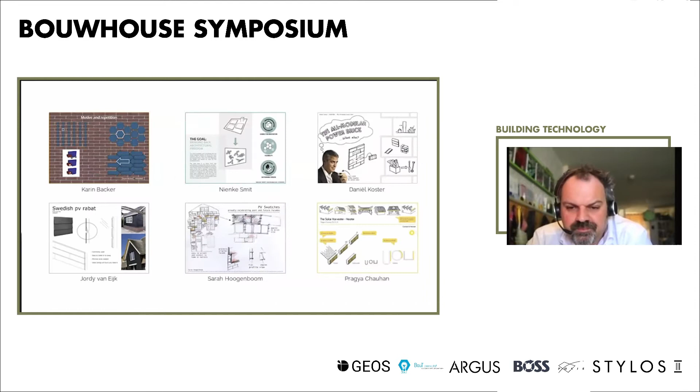We pitched our individual ideas during the first month and came together as a team. We were able to bring architecture and engineering together for a creative design process during the 13 weeks, and we designed a modular product which emulated the look of a brick and could be flexibly installed to get different brick patterns on the facade. We arrived at a unique product which is essentially a solar powered brick.

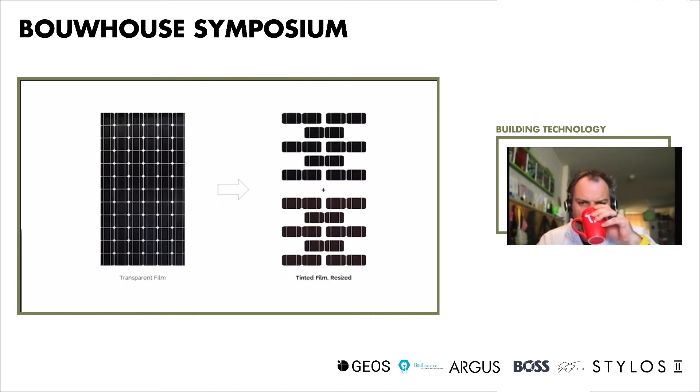During our design process, we were able to talk to experts from the PVMD department at TU Delft, and we were able to determine the best PV material and application. The flexibility of PV technology allowed us to apply it in our design with ease.

Our design changed throughout the project based on research and other design factors such as the ease of mounting and replaceability. Our team created various ideas and concepts and looked at each one critically.

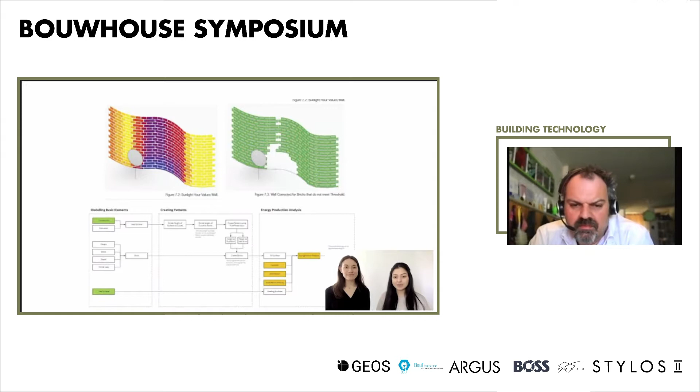We utilized software such as EduPack, which were introduced to us during the Bucky Lab engineering courses, to come up with a suitable material, and we used knowledge from our structures course to be able to decide on a target construction type. We also used computational design to visualize efficient placement of our product on a shaded facade. We went from sketching ideas on paper to working with real materials that resulted in some very practical insights.

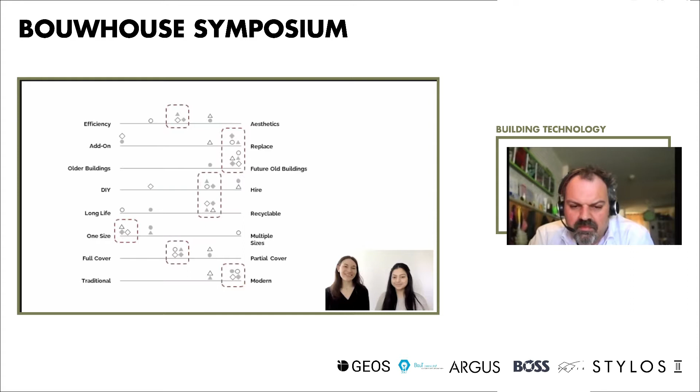And here are some of the results from building weeks. Don't misunderstand us. As individuals on our team, we started week 1 with different visions of what our product would end up looking like. But by the end, we found a common ground through the design process and came up with our final product, the energy brick.

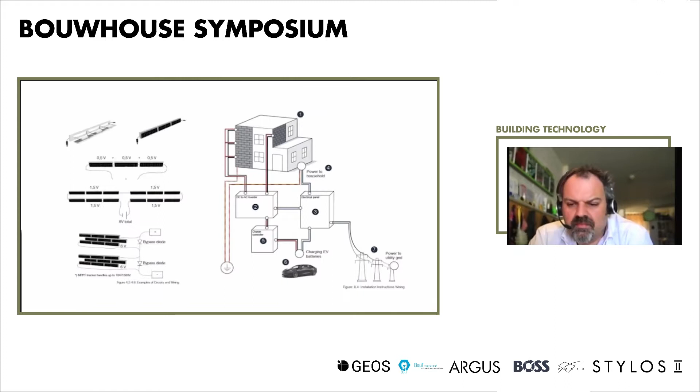The Bucky Lab course for building technology was a unique experience to work closely with students of different backgrounds and to learn more about the technical and practical application of architectural design. We hope to see you next fall in Building Technology Masters. Thank you for your time.

If we go up one scale higher to the building, we have Mega, which deals with a huge project and a nice setup in which the students collaboratively work in a team.

Hello, my name is Shreya, and today I'm going to share my experience of the MEGA course during the 4th quarter of my Building Technology Masters. Along with a team of 8 students, each responsible for their own discipline, we as a team took on the task of creating a skyscraper called the Tree Tower.

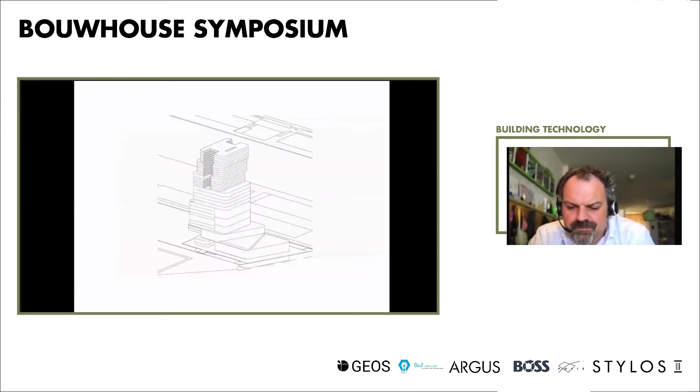The design of the Tree Tower rests on the foundation of the team's vision. The vision was used as a starting point throughout the entire design process. The tree tower acts as a multifunctional building merging industrial, commercial, and residential real estate. With this unique combination of program, the tower is envisioned to be a hub for the surrounding Makers district.

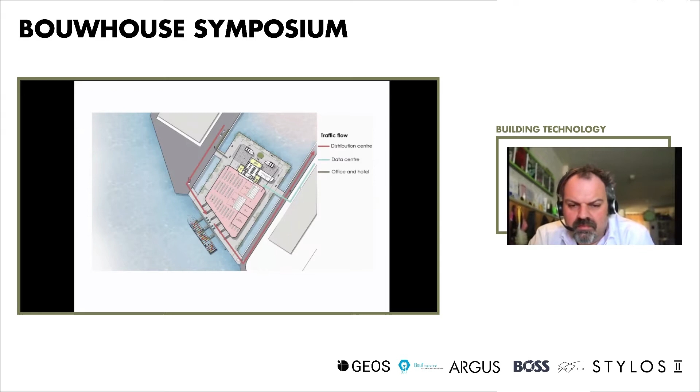A clear distinction was made between the transport of goods and that of the people. By locating the entrances for different functions in separate positions, the transport and logistic flows are smooth and efficient. Similar to how a tree adjusts to external factors, wind and sun played a key role in shaping the tower and determining its orientation in space.

The roots of the tree are interpreted as the part that collects goods, which then will be distributed inside the building and its environment. The concrete core, posing as the trunk, is used for stability, yet it also realizes the transport of water, air, and energy. The green terraces correspond to the branches of a tree. The green areas are positioned in places that allow for maximum daylight to enhance growth.

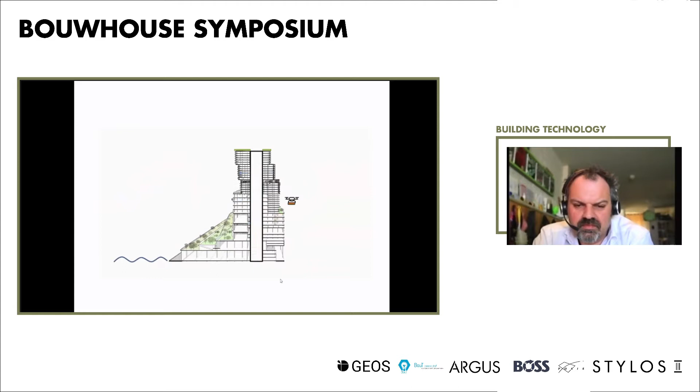This course was a very good experience while working off campus and communicating through online collaborative platforms. It not only enabled me to guide the group as an architect, but also enabled me to understand the issues related to the other disciplines and come up with a suitable solution. This course allowed me to push my boundaries and explore the different specializations in the field of building technology.

That was mega. And if we continue on a building scale, but a little bit broader, we have extreme, which deals with a bigger scope.

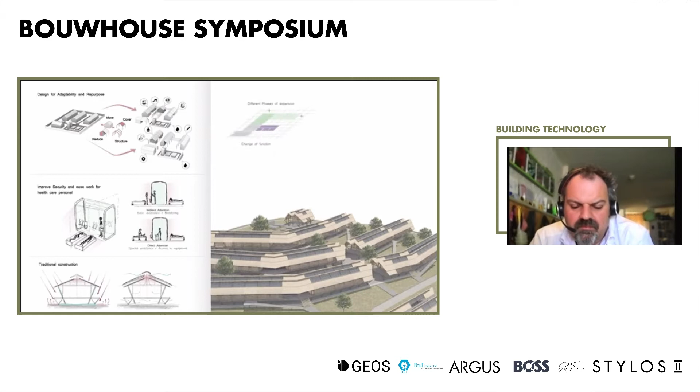The idea was to create an adaptable structure that could later be used by the communities for other functions. The main structure was designed under a modular configuration to attach more units in a linear way, and to accommodate multiple functions and provide flexibility for the spaces to be adapted later on.

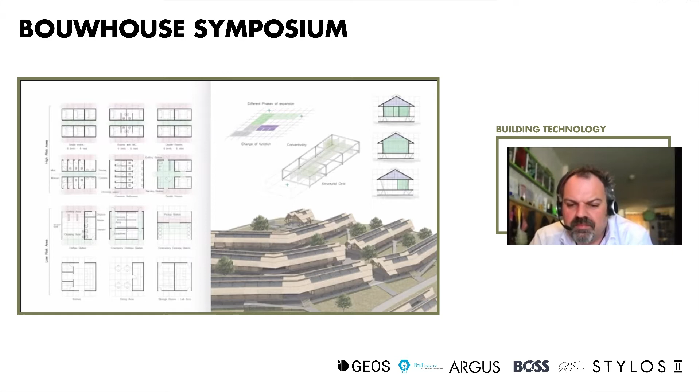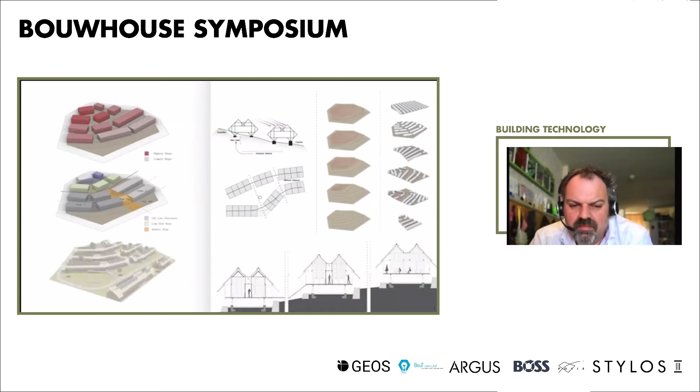For the distribution of these units, an algorithm was developed to analyze the site of intervention and determine the position of the rows of units, avoiding obstacles and following the topography to create leveled corridors.

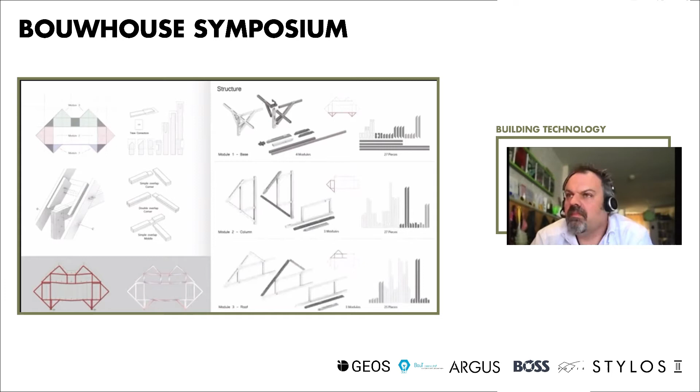The structure of these units was designed with wood pieces of simple shapes and cuts, which are then mounted together to build the main modules for the floor, walls, and roofs. A lot of focus was given to the assembly logic as well, to facilitate the construction and reduce the time and the amount of workers required for this process.

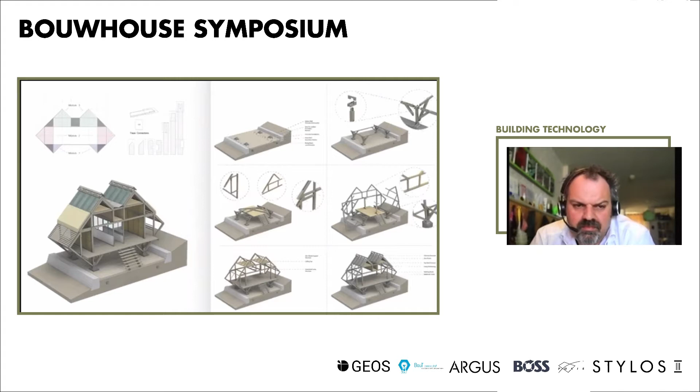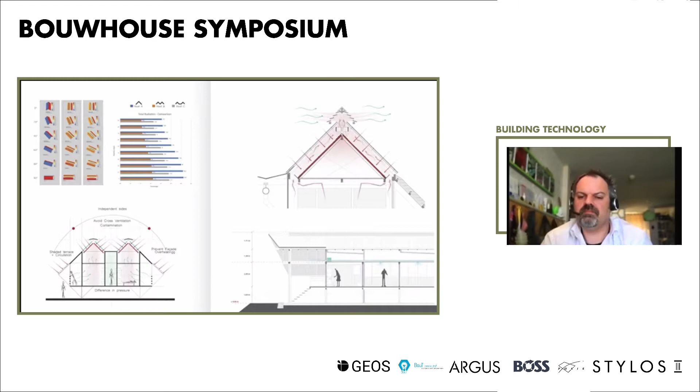For the passive climatization of these spaces, a concept of hybrid solar chimney was implemented with the goal of incrementing the ventilation on the rooms. The system was combined with a mechanical air inlet to create a positive air pressure corridor for the safety of the healthcare personnel. These were the main highlights of the project.

It was a very challenging exercise that required an integral approach of an architectural, structural, and climatic solution to respond to the given requirements. You can see the projects of our batch and the ones from previous years on the Extreme Architectural website. I hope you enjoyed the presentation and thanks for your time.

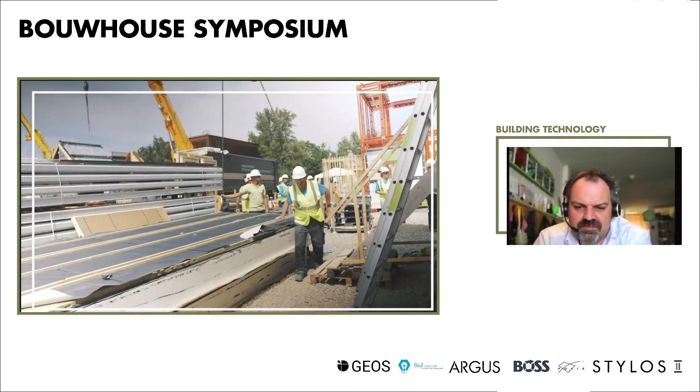So what's happening now is that a wall element will be placed in its right place on our building, and with the help of a huge crane and with the help of some other people it will eventually go into its right place.

Shift 2 is now preparing for the briefing about what has to be done today, and everyone is going inside.

They were raising the flag? We're raising the flag? Yes. We're raising the flag. Nice. Let's do it!

And of course, after a long day of hard working, we also get to treat ourselves a bit. So tonight we have a special occasion and we're going to barbecue with the whole team, so it's very nice.

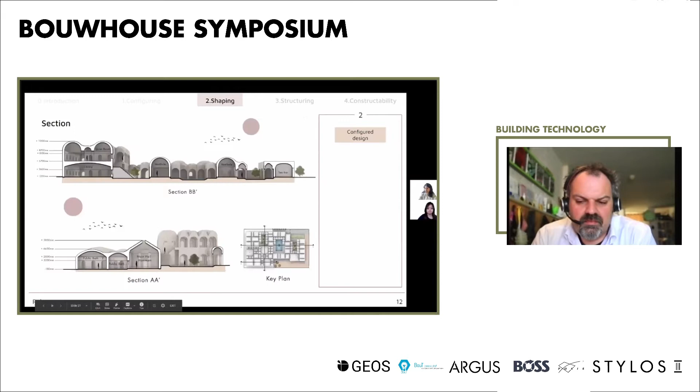The configured design then enters the structuring process. Here, the focus is to design roof typologies such as domes or cross vaults using the principles of tessellations, which are relaxed as meshes and then approximated into surfaces. The primary construction material considered is adobe bricks, and its material properties are used to analyze the structural performance.

To test and understand the constructability of the proposed design, an experiment was carried out. This inspired us to think about the practical challenges, for which we designed a tool to support the construction while eliminating the use of additional formwork.

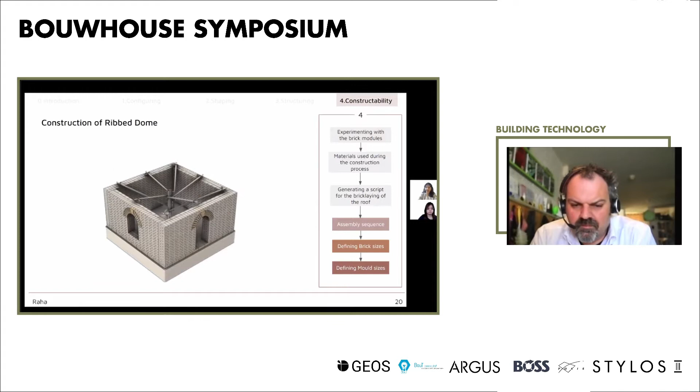This year's aim for Earthy Design Studio was to design a challenging Adobe 2.0 structure that has not been realized so far in reality. For this, a lamella dome tessellation was visualized. This was our journey through the course, and we hope you enjoyed it.

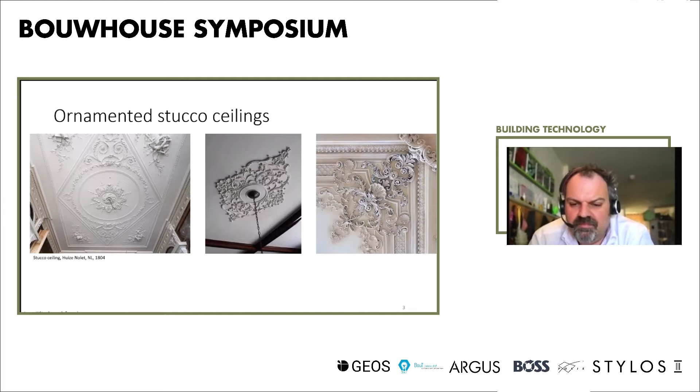Stucco ornaments can be found all across the world, and in the Netherlands especially we find them in the form of ornamented stucco ceilings. Unfortunately, these ceilings are quite fragile and they can damage over time. Traditionally, they are restored on-site by hand, but this is a disappearing craft due to several issues in this field.

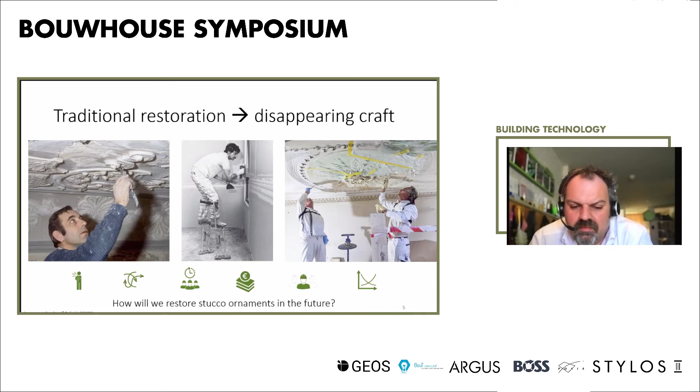So the question becomes, how will we be able to restore these ornaments in the future? My proposition is to use 3D scanning, digital reconstruction, and to restore them by 3D printing them directly onto the wall or ceiling with a robot arm. For my project, I focus mainly on this last aspect.

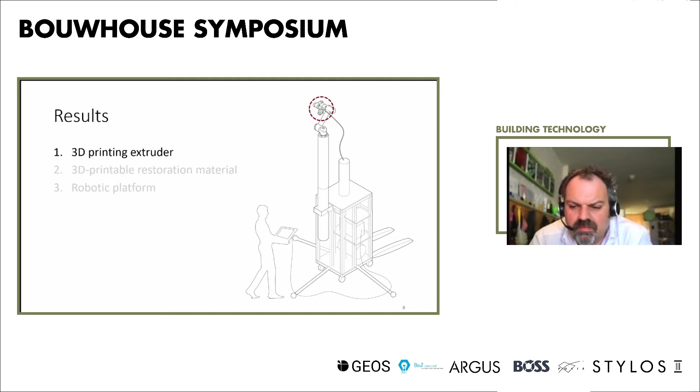The result is a set of new tools for restoration. They include a 3D printing extruder, which I designed and built myself, which can be attached onto a 6-axis robot arm, which can then be used for 3D printing.

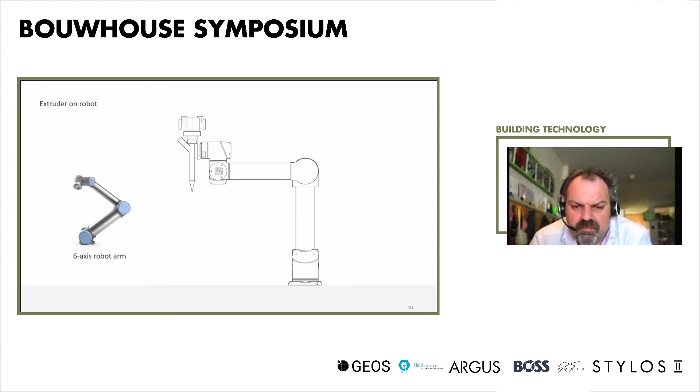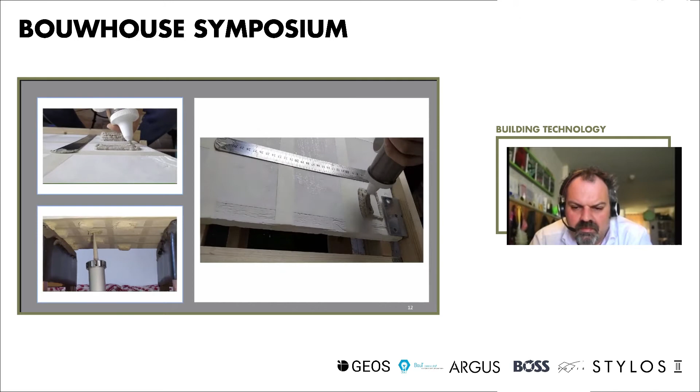I also worked on the printing material itself, and here you see several experiments that I conducted to find the right composition of this material so it could eventually be 3D printed upside down. I also worked on the robotic platform, which consists of stabilizing legs and a crane onto which a robot and extruder can be mounted.

So what would this new restoration methodology look like for stucco ornaments in the future? Imagine we have this damaged ornament. This ornament will first be 3D scanned, and this is the geometry that we acquire.

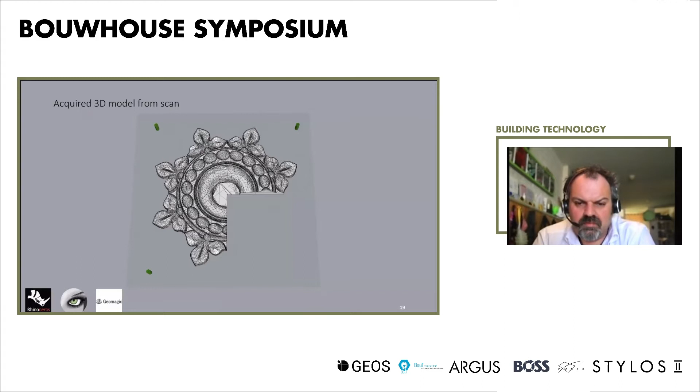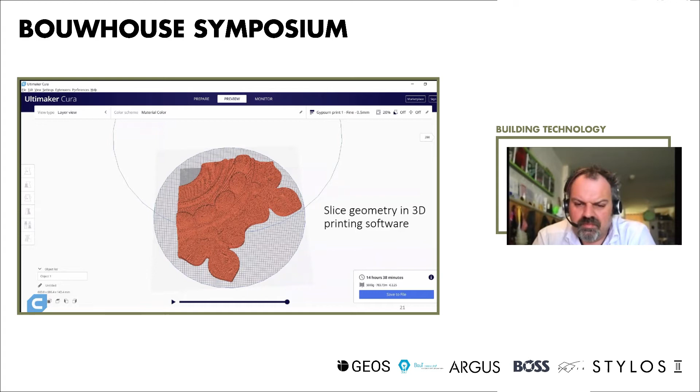Next, the missing geometry is modeled. After that, the missing geometry is sliced in a 3D printing software and eventually put into a simulation software for the robot toolpath. The restorer brings the robot platform to site, stabilizes the platform, mounts the crane, and the robot is ready to print.

It then approaches the ceiling and autonomously 3D prints the ornament on site. And this is how the ornament is restored, and by doing so, helps us preserve our collective cultural heritage for future generations.

So while this was quite a hands-on approach, we also deal with topics that are more within the field of building physics, for instance. Pratik made a very good project in order to think about how to make our buildings more resilient.

Hello and welcome, I'm Pratik Wahi, and in my graduation thesis I investigated robust design solutions for energy efficient educational buildings in future climate. The Netherlands aims at decarbonizing the built environment by reducing heat consumption. To achieve that, the primary design strategy is to increase insulation, airtightness, and maximize solar gain.

However, these strategies in summer trap the heat like a greenhouse and cause overheating. Now, overheating is a primary cause of thermal discomfort, and it's quite serious because occupants spend 90% of their time indoors. For students, it's even more.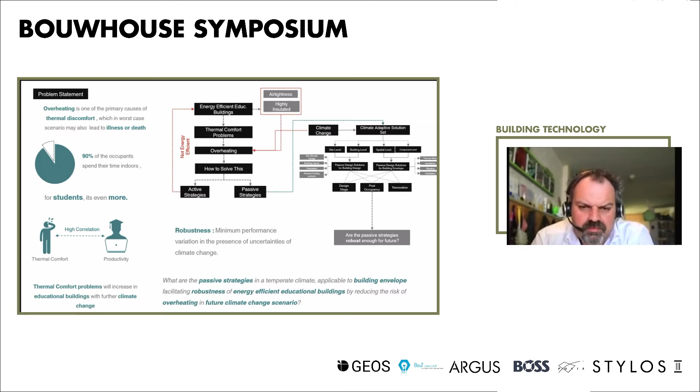The research employed design by research methods over two case studies: the Pulse building on TU Delft campus and Melanchthon School in Rotterdam.

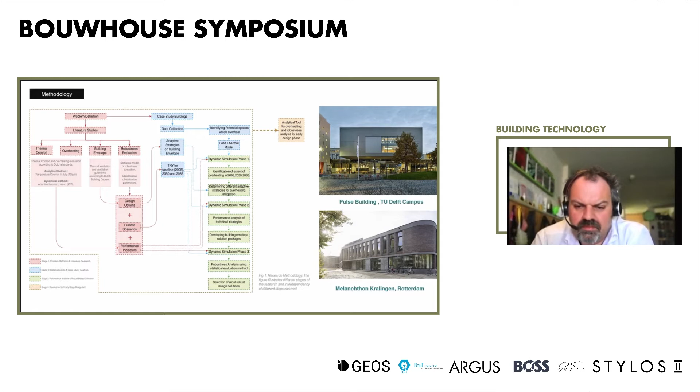From the research, I found that a combination of these passive design strategies can really reduce the percentage of discomfort hours in 2050 and 2085 in the two case studies I mentioned before.

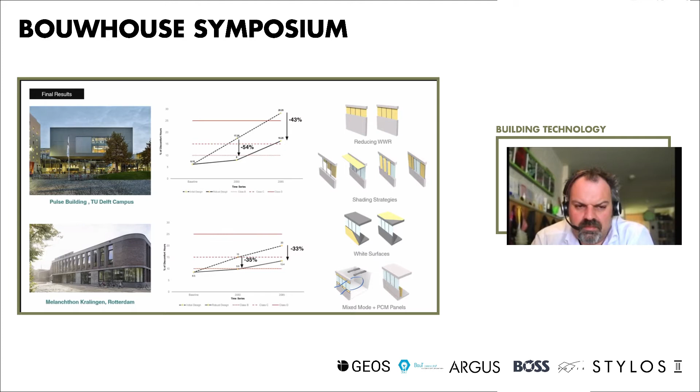Concluding, I would like to say that climate change is real. As designers, we must look into the future as well, providing a comfortable built environment through some out-of-the-box and robust solutions.

Thank you. So while Pratik was already talking about 2085 and looking into the future and how to make our buildings survive these climate changes, we would like to go into the next phase of our presentation by talking about what happens after you graduate from Building Technology. In order to do so, we have talked to our alumni, but we'll also have a look at the company side. But first, have a look at where our students end up.

According to our recent research, about 35% end up in offices within the consulting topic, 30% in industry—companies who build our buildings, like products from the sun shading industry, facade industry, but also huge contractors. 20% join architecture offices and become experts within the office. And about 5% continue in research at other universities all over the world.

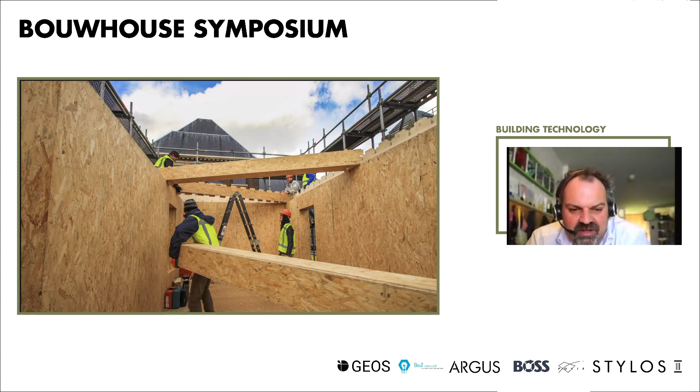Bye. So I think within the last couple of different perspectives, I hope we have been able to share what building technology is about. So in principle, you have to make your choice. You can either choose the building scale, maybe joining one of our next experimental projects in the fight for circularity in order to make pre-manufactured, digitally constructed buildings.

Maybe you join one of our experts and leaders in glass research by melting glass and creating the new Chanel shop in Amsterdam. You may end up getting your hands dirty, working with digital and analog tools in one of the Bucky Lab workshops, for instance, and end up as a product designer, designing wonderful sunshades, for instance.

You might also choose to tame our robots within the chair of design informatics. Think about how digital production techniques will help us increase the speed of our building progress. And you may also find yourself becoming an expert in acoustics, and in this case, also in a 3D printed prototyping stage that allows techniques and forms that are not possible with standard techniques.

You might also be the next one who tackles the opportunities of load-bearing structures in glass, as seen on a building fair with the glass swing. You may end up with an interest in glass constructions and figure out how a structural bridge out of glass could be made. As shared with the Solar Decathlon competition, you can also share on a building scale and actually build a building which will undergo 10 different categories of this Decathlon project.